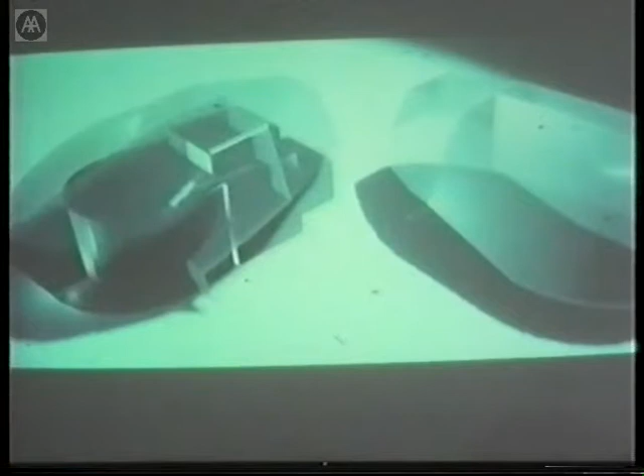So where do we stand today? About 70 years ago, a new approach in technology began to emerge, more holistic and less mechanical. Unlike mechanization that involves the discretization of a system into its component parts, this paradigm proposes the integration of the various components of a system into an isotropic integrated whole. With the birth of the integrated circuit and the information age, integration took command.

Within architecture and the contemporary context, this approach increasingly synthesizes disciplines and new working procedures and networks. New architecture inhabits a section through many spheres of knowledge. Structure, which has always ordered architectural space, can no longer be seen as discrete. Digital technology has created a new order with regards to form, function, methods of production, and materials.

New strategies are needed. Holistic strategies that integrate structure, programmatics, circulation, surface, sun shading, aerodynamics, building physics. New opportunities will be evaluated for their potentials across disciplines. It's a certainty with this kind of complexity comes opportunity. Therefore, it follows that he who controls the tools controls the outcome. And it's the control of these digital tools that we seek. That's the theory.

These are the projects. So I'll just show 5 or 6. Starting with a project that actually I was involved in before I joined Arup. It started 10 years ago in 1994. It's the Singapore Arts Center. And our brief was to develop a dome over 2 opera houses, an opera house and a concert hall in Singapore. And the intent was to make these domes kind of like the kind of leaves that sunshade public spaces in that part of the world.

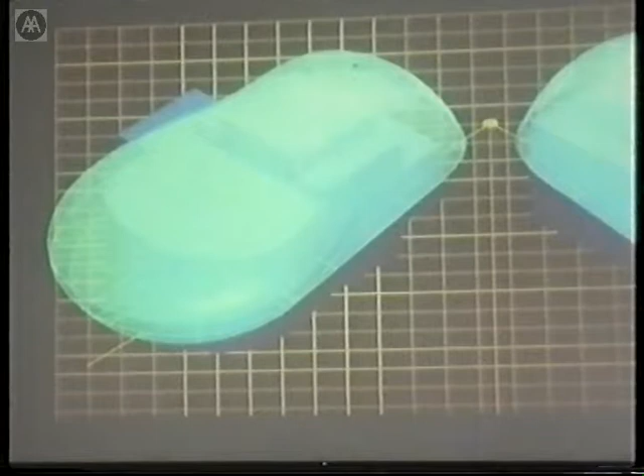So at Atelier 1 at the time, there was a young architect, Barnaby Gunning, who discovered this NURB surface facility in MicroStation. And after a lot of research on soap film surfaces and so forth, we decided to use a NURB surface, which is a kind of arbitrary surface description that comes from computer gaming and animation, mainly. It's based in projective geometry, and basically uses an equation to describe with engineering precision a very amorphic surface. So Barnaby discovered that, and we mapped a sort of tight fit soap bubble, if you like, over these 2 domes.

And then there was another engineer who was involved in a lot of the structural analysis, Chris Hornsey-Jones, an aerospace engineer, who came with the idea of the equal link-length mesh, which is a bit like the Mannheim grid shell from Arup and Frei Otto. But in our case, it wasn't intended that we push it up. We were just using this as a tool to map the surface.

So it's like if you imagine a kitchen sieve. It has fibers in 2 directions, and it would lie flat like a screen. But to impart double curvature, you sort of shear it together as you press it over a dome shape. So the quadrants in the 4 corners lozenge, and the included angle between the members closes up to allow you to tuck the surface together and curve it. So we mapped an equal length mesh over the dome by swinging arcs, but because the surface falls away, we had to swing spheres.

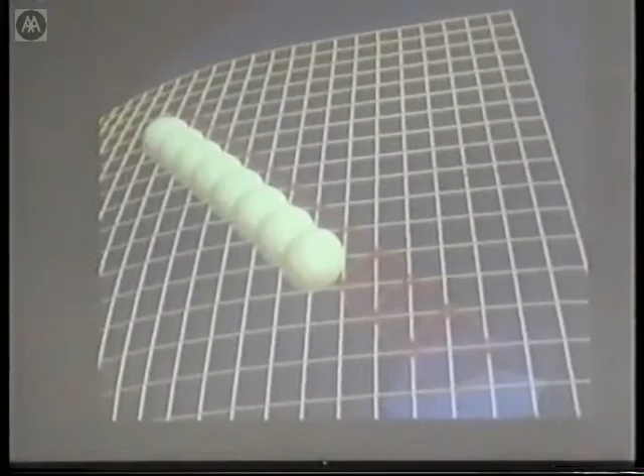And after we developed these meshes, we sort of mapped and described the surface. This was an effort to establish, because all the glass panels, triangular glass panels, would have different angles, always 1500 on two sides and a different included angle. So we're trying to map bands of the variation in the included angle so that you could have a standard double glazed unit.

And then one of the curious things that arises, really through serendipity in a design process, was the fact that along one of these geodesic projections through the mesh, you can see the included angle here is greater than 90 degrees, and it reduces down to 90 degrees around this point and further down here.

By taking one standard diamond shape and fitting it in that bay, as you develop across the surface, that angle folds and the sun shade bumps out. Singapore's on the equator and this building faces north and south, so it excludes light from the east and west and allows views north over Singapore Harbor, and at the back it allows views south out of a rehearsal area. So there's the finished construction. There's a couple interesting things along the way.

Mero won the tender for the structure, and I don't know if you guys know the Mero. It's a spherical connector in a space frame system developed by Max Mengeringhausen. And for years they just drilled 4 holes at orthogonal angles for the bottom chords and 4 holes for the diagonals, and it's a single bolt that goes into the holes. But they'd been tendering for that project with Frank Gehry at Pariser Platz for the bank, that curved grid shell. I think Schlaich ended up engineering it.

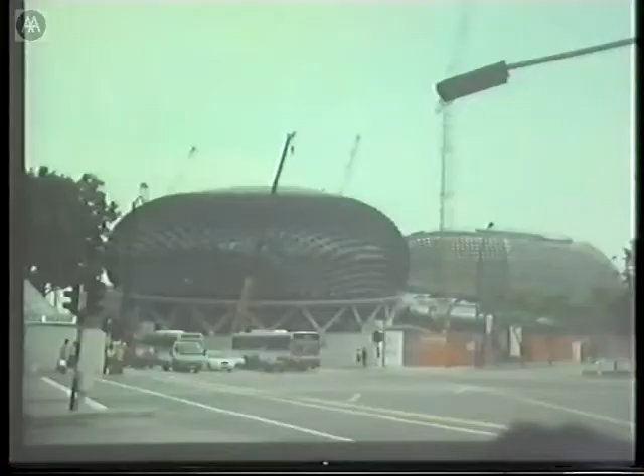Here's the finished project on site. Well, after that, I kind of realized that those buildings faced exactly north, south, and east, west. And as I said, Singapore's right on the equator, so the sun moves directly from the east overhead.

But I thought if the building had been rotated through 30 degrees, the whole sun shading system would have had to be developed through an asymmetry, and perhaps the surface of the dome. In a way, in Singapore, we held on to symmetry, because although we knew that there was an incredibly complicated geometry, somehow the symmetry gave you a kind of basic reference. But after that, I realized the symmetry was irrelevant.

And I wanted to work on a project to take space frame and almost start bending it and tearing it and kind of weaving it like a pretzel. And so this project came up, which Cecil Balmond and myself did with Philip Johnson. It's Chavasse Park. It's a kind of crazy proposal for Liverpool, which went to a major public inquiry and was eventually declined planning. Which was probably the right decision, actually.

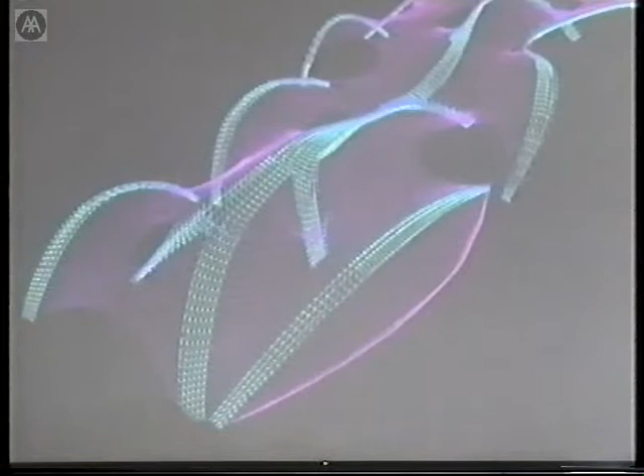And this is a model produced by Francis Archer, one of the guys in the group, very clever engineer with a mathematician's background. And here, all the arches are modeled as space frame, and the areas of anticlastic curvature, which is the saddle shape, in which you could have fabric, because the curvature of the warp yarns pulls against the curvature of the weft yarns. So here we're proposing cable net as an infill between the arches. But of course, following the general rule of lightweight structures, the less you see, the more it costs. So curiously, a full space frame solution was much, much cheaper.

This is just a daylighting study, daylighting factors. The idea was under this canopy to create like the Riviera in Liverpool. And then this is a view of the solid model just before we built a rapid prototype, that STL, the resin model you saw earlier. And here's some of the structural analysis, where you can see broadly these purple lines indicate the compression moving through the arches. And here's analysis of a full space frame option.

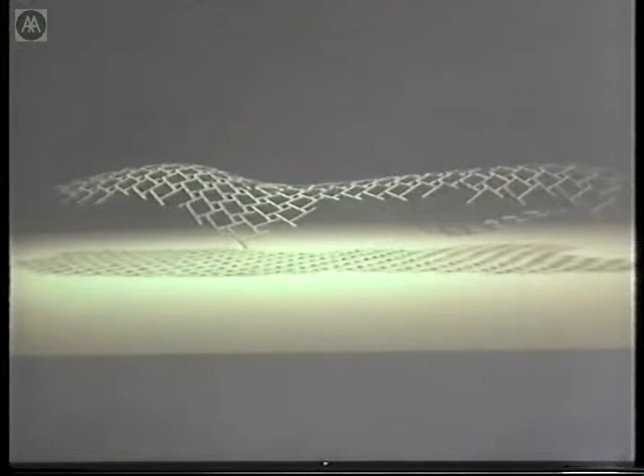This is a project that we're involved in with Shigeru Ban. It's in St. Louis in the States. And it's a timber grid shell. It's in a park called Forest Park. And it's sort of like a Serpentine Pavilion type of scenario, but this is a permanent picnicking pavilion. And it's a reticulated timber grid shell using discontinuous boards.

So what's quite nice is we're using the boards. The boards are straight, and they're offset against one another, so they overlap each other at the connection. So through this small overlap at every connection, you develop a small amount of synclastic curvature. And similarly, if you overlap the boards in the opposite direction, rather than clockwise spiraling upwards, if you go clockwise spiraling downwards, you'll develop synclastic curvature that's concave upwards. And you can also develop anticlastic curvature.

So one of the guys in the group, Tristan, just used, within our analysis software, our nonlinear solver, a tool where, as a kind of pre-stress load case, you can apply a lack of fit to a structure. So what we do is we just build the whole grid flat, and then the overlap is applied as a lack of fit. And what happens is when you run the analysis, the surface just bumps up into the curvature that it takes.

And so here's a model where they're spiraling downwards in this direction if you go counterclockwise, and upwards counterclockwise in this direction. So the surface that develops has both curvatures.

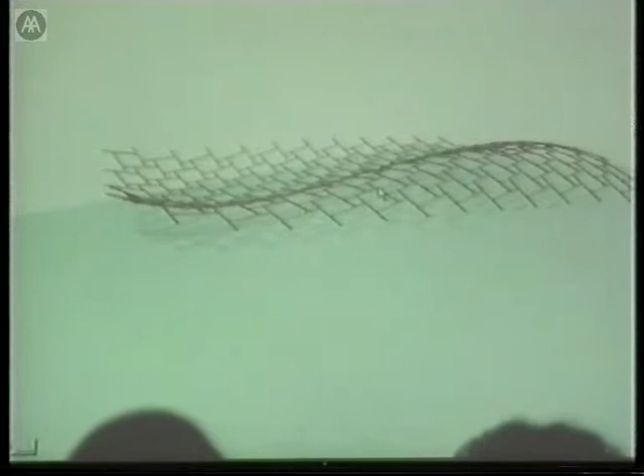And one of the guys in the group, Benedict Schleicher, who I think I saw here earlier today, went with Shigeru Ban to Rice University, and they built this 1/2 scale mock-up, which demonstrates the system. What I find particularly interesting about this is it's not really a form-found surface, but the surface has very specific properties, because you can see the boards here are curved, and the geometry doesn't just move into a state where every board is straight.

There's a lot of locked-in internal stresses. There's a lot of embodied strain energy inside the surface once you've applied all these twists, all these overlaps. We have to make sure that it's not too difficult for the people on site to assemble. Otherwise, they physically won't be able to manhandle the boards into that position. So we have to study those locked-in stresses.

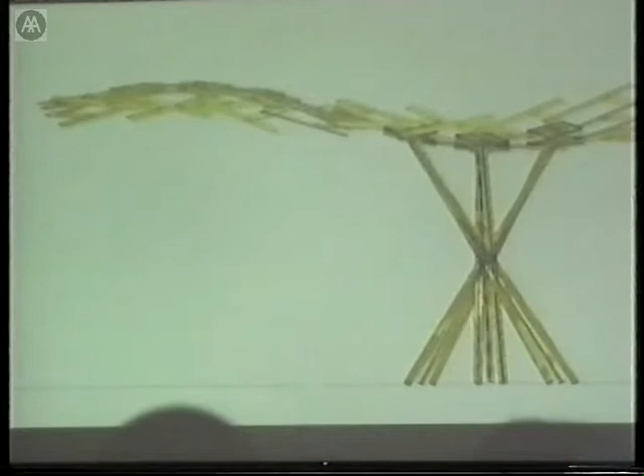But also, the surface itself is developed through not just straight geometry, but through the inherent qualities of strain energy within the surface. So it's like an integrated geometric and statical surface operating at the same time. So that's just beginning on site a little later this year in St. Louis. And these are just studies for the column, the idea of putting little plates inside the smaller squares in a bundled column.

This is the Ito Pavilion, which I'm sure many of you have seen. This is Ito's original proposal. He had a couple of strategies, but these two both refer to the idea of a beautiful box. The one on the left is a little bit like a pavilion he made in Bruges, and the one on the right, he drew on some ideas. He'd seen Cecil's proposal for Chemnitz Stadium, and he was interested in the idea of the use of algorithm to develop geometry.

And you can see his original models, which are effectively just a chaotic arrangement of bars, which certainly would have been possible. I mean, we could have just solved that and built it. But somehow, Cecil felt strongly that there was an underlying inherent order that could achieve the same, or even stronger visual quality.

And he and one of the engineers in the group, Daniel Bosia, found this algorithm, which is incredibly simple. It's just taking a square, going from a half to a third, half to a third, half to a third, developing the square as a ziggurat, and similarly going from a half to a third, developing the square, and so on, until you get this pattern, and then extending the lines out to infinity. So that pattern developed the entire geometry of the pavilion. The center of the square is offset, otherwise all four elevations would have been the same.

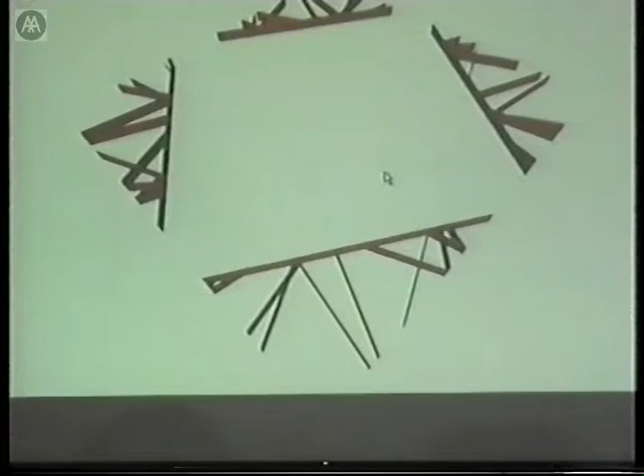And that's exactly how it was built. This shows it still before the center of the square had been moved off. But it was built through a panelized system, so it's literally a ziggurat of steel beams, with all the members off the side here just purlins that restrain that steel flat against lateral buckling. And the panels were built in sequence, spiraling toward the center.

And with William Hare, steelwork fabricators, we used this package Xsteel because there's about 1,500 plates here. And quite importantly, all the plates had to be cut square, because they were cut out of large plate or off of bar with a laser cutter. But the exact line of that cut related to the thickness of the plate that it came against, as well as the angle that it came against that plate.

So Xsteel is a package where you basically build a virtual building model of all the steelwork. So there's no shop drawings involved, and each plate is stamped and cut. And so you can see, it was only later that Ito decided, really because of solar heat gain. Originally, this was a glass pavilion, as per the earlier models.

And there was a sort of standoff between us and Tokyo when we told them, it's going to get too hot inside there, and some of it has to be opaque. And it was sort of like 15%, 20%. And finally we said, no, 50%. And then there was about a kind of 10-day radio silence.

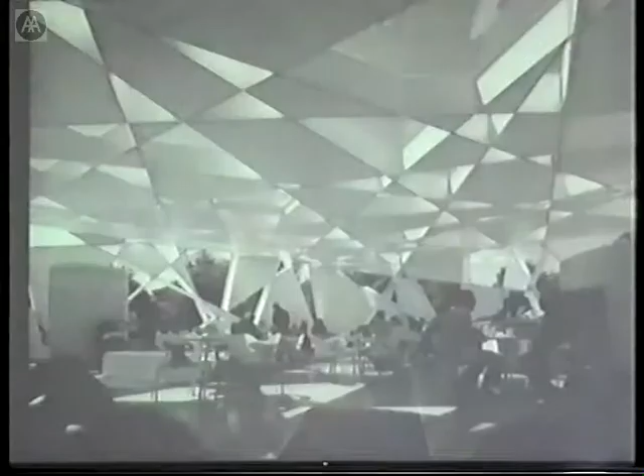This is a project we did with Chris Ofili and David Adjaye for the Venice Biennale. It's a little glass ceiling that was indoors inside the British Pavilion. And Chris had this pattern of a 7-pointed star that was a motif that ran through all the paintings he was showing. And he asked us to make a glass ceiling, rather like this pattern.

So these are some of the early models. We have a thermojet in the office, basically used for visualization. And what we eventually developed was a circular arrangement with 7 septants of standard geometry. And Daniel Bosia in the office wrote a little routine where from the center of gravity of every panel, they were distorted out to match this slightly coffin-shaped perimeter of the room.

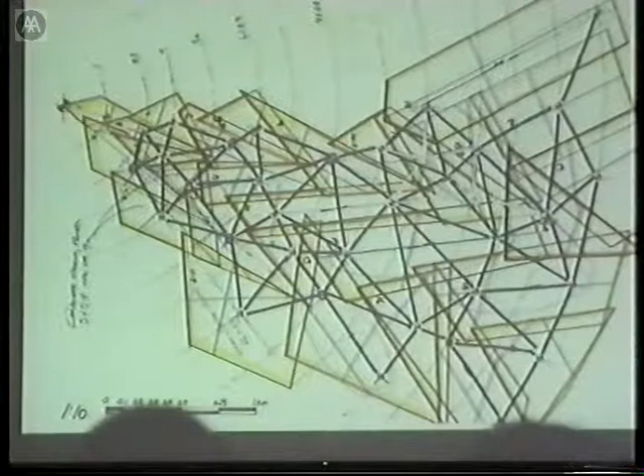And then once we'd mapped the geometry, we took center gravities, and Lip Chong, a student of Michael's from Unit 4 who's working in the group, did all the collision detection in the computer so that we knew none of the panels were hitting. And we identified the center gravity of every panel. And from that point, put in a space frame node with half of the nodes at high level, half at low, and developed this kind of slightly eccentric space frame topology.

So these are the bars that the glass is glued to, and that's the top chord of the space frame. Those are the braces, and then the bottom chord of the space frame. So here you see this kind of eccentric space frame geometry relating to the center gravities, and then with the glass beneath. And we got Marot to make the space frame for us. Structural analysis is nothing particularly of interest.

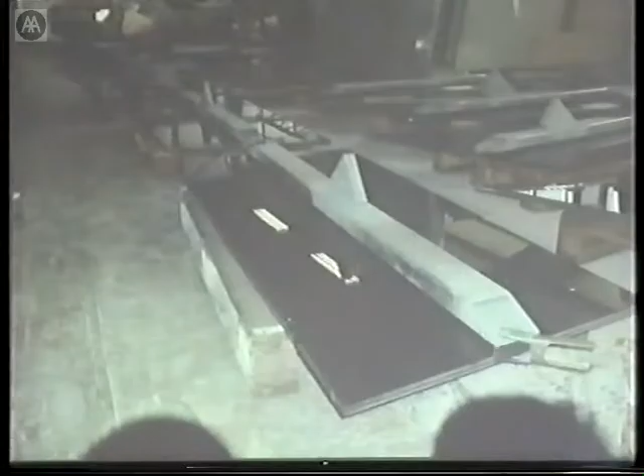And that's the model of the ceiling inside the hall in the British Pavilion. And you can see it was a very beautiful space frame, actually. These are some of the drawings. And the glass panels with the structural silicone. And this is the assembly on site.

We were very limited because of time on the color of the glass, which I think was a great disappointment to the success of the installation. But here you can see the kind of motif in the glass ceiling.

You've probably all seen the Marsyas project, I suppose. What's interesting and what we've learned from Anish Kapoor is that Tristan Simmonds, who was the engineer, slightly modified our software. Because it's indoor, it's extremely light loading. Normally you're looking, in membrane structures, to find a uniform stress distribution. But you can actually nip and tuck a membrane rather like a suit. So after you've found a surface of minimum area, you can begin to tweak it.

And Tristan worked incredibly closely with Anish to kind of tailor this into the exact sculpted form that he was looking for. We spent about 3 mornings from 8 till 10, or sometimes 11, 3 days a week for a period of about 5 months before he was happy with this. It was quite amazing to look at somebody who works with such control over their medium. And there's the installation coming in on site and being stressed.

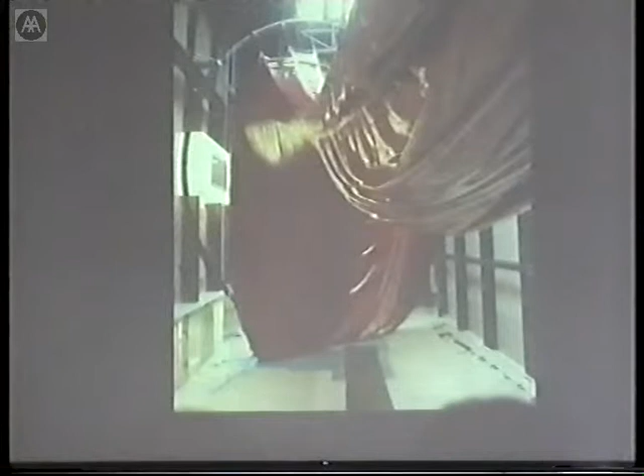And the finished installation. The steel ring was impressive hanging, but effectively, you can see in these joints, there's actually a nylon webbing belt that runs the full length of the hall, and that's a 150-meter long catenary. And then the membrane in this area is effectively hanging across those series of belts. The thing was, when you're inside the space, you couldn't actually see the catenary, so you had no idea how the ring was supported.

Okay, this is the last project I'll show. It's the one we're working on now. About 6 months ago, we got involved in master planning at the Battersea Power Station. And the group is involved in this whole area, the South Park, but I'll just show this one office building that we call the Twist.

The form arises out of specifics of the site, but the important quality of it is the client wanted it to be permeable to the community beyond at ground level. So it lifts up off the ground and then comes back down on the opposite side. And there's a core at either end. And the main problem is spanning 60 meters between these two cores.

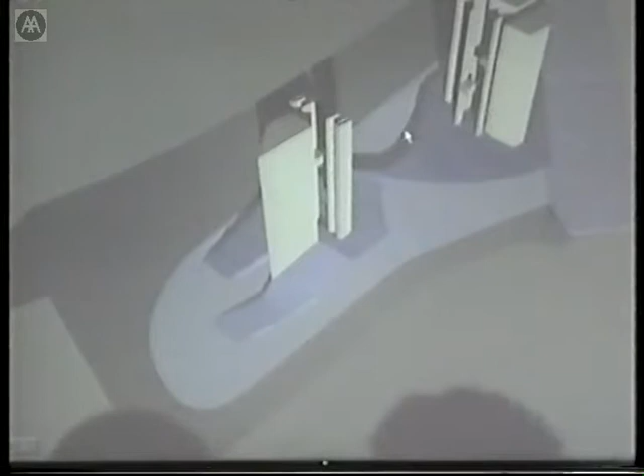So beyond just the twist in the external form, here you see the cores. We've looked at a system of running trusses across that space. So the idea was, within an atrium space, to take the edge of the slab and actually twist it up and develop some kind of truss profile through the atrium. So here you can see the surfaces twisting through 180 degrees.

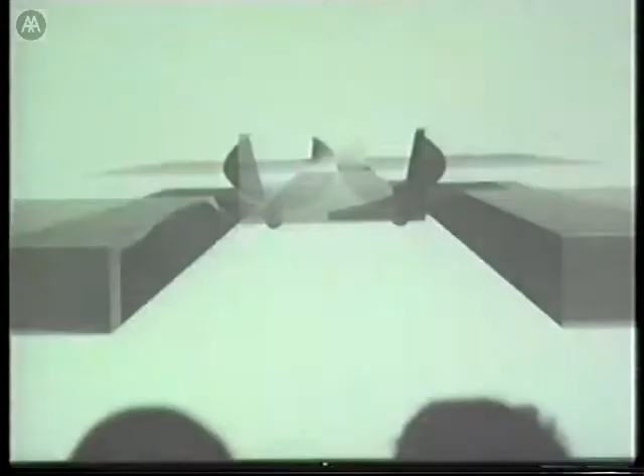And also, this building's used as a kind of showcase building for products. So they just want people to be able to move through it in many different ways. And so what we're trying to do is integrate circulation paths with structural trusses. So this is a kind of quick build-up of that atrium zone and the floor slabs that relate to it. You can see there. And then from the center, it's built up in this way. And a laser cut model showing the routes that one can take through the building.

So here you can sort of see, this isn't the exact solution, but the kind of bending moment profile between the two cores, and in plan. So the plans are kind of curious. You get this atrium zone with twisted trusses. And similarly in section, you get a very regular section at the one end and then going through this transformation as the twist passes through space.

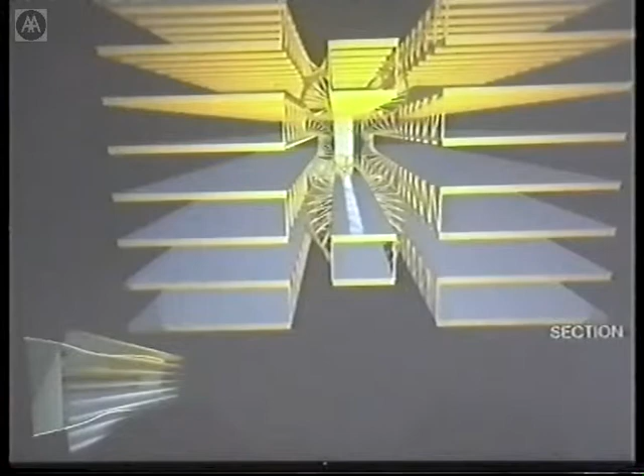And this is a kind of fairly crude model showing the buildup of the trusses and then the steel composite flooring going in and the atrium space in between. So that's getting pretty close to the structural solution for that atrium zone. And there's a short animation here, just kind of moving around the building.

And so the intent is you enter from the southwest corner. This is going to be a building, hopefully, by UN Studio if we're successful in securing their appointment. And then there's a route on the right through a kind of public space at the lower level and then into the center of the square. You can see the cladding hopefully will be a kind of opalescent, not necessarily dichroic glass, but something where you can see the reflection of the city, the overall form, and the activity of the building beyond.

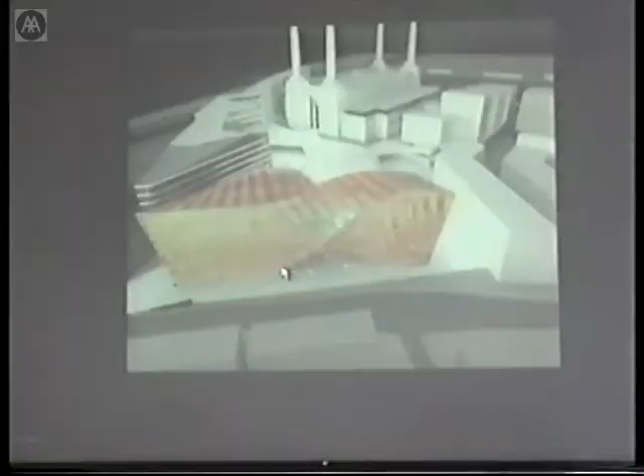And there's just one more slide of this, which is quite a subtle one, but it shows the system of triangulation that we're intending on the facade. And just to give you an idea, basically the twist is defined by two splines, and then the surface is just lofted. So there are straight line generators, and in the system of triangular facets, those straight line generators form one set of joints.

The second set is formed by the floors themselves, because in a cladding system, you need fire compartmentation and isolation between the floors. So there's a second line that passes through here in the jointing. And then the third line is just the diagonals which that forms. But what I find really remarkable is that the resolution of this diagonal edge of the twist has actually been integrated within the triangular system of the glazing.

And I think it's that kind of subtlety in the formal manipulation and the constructional logic that forms the basis of the kind of building, and that kind of integration of performance that we seek, both in projects like in Singapore or here in London.

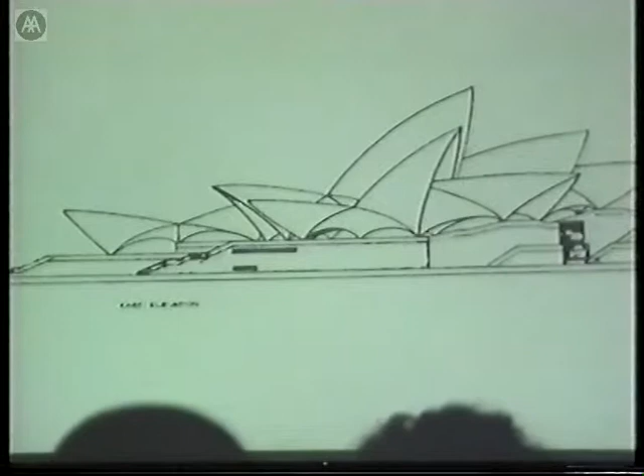Thank you very much, Charles. Talking about applications in very different circumstances and conditions with very different outcomes. Charles's talk, I think, helps very much to make the link between earlier contributions, from the theory through to the design conceptions and then into realized projects.

And now, for our final talk this afternoon, we have Johann Sischka of Waagner-Biro, based in Vienna, who's going to talk about manufacturing complexity, something that he's done quite a lot of, particularly in projects such as the roof over the Great Court of the British Museum.

Okay. Good. Thanks for the invitation. I just saw that my computer is switched off, so I think it takes once again some time to get it up to speed. Maybe it comes easy. We'll see. Working now, isn't it? It's once again off. It's okay, yeah. Sorry for the problems, but I think we've resolved them.

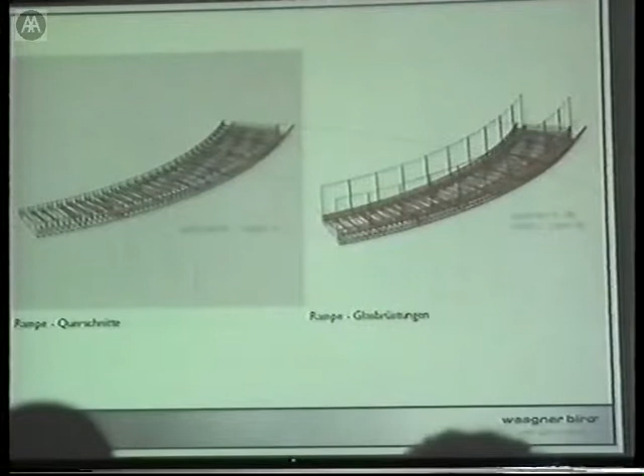What we did when we developed the computer program to realize it, we started off with the curve, which is the one which was given by the engineer. We also had to calculate the level of pre-camber once the load is released to get it horizontal. And what we did, here you see the section, we just put the section every 25 centimeters along the curve with the right pre-cambering, and then we combined all these profiles to get the shape, and then we created the plate out of it, which finally was unfolded to be cut.

And here you see the various elements, and this is the principle of how we fabricated it afterwards. The only thing which was constant over the length of the ramp was the section. So we created these forms which represent the section, and we have reassembled them onto a flat plate for each individual ramp section, and then we laid out the profiles inside there, as you can see here. Here you see the plate which goes into this form, into the template, and here you see how we marked the positions of the other plates which have to come in, and so we finally reassembled the whole structure.

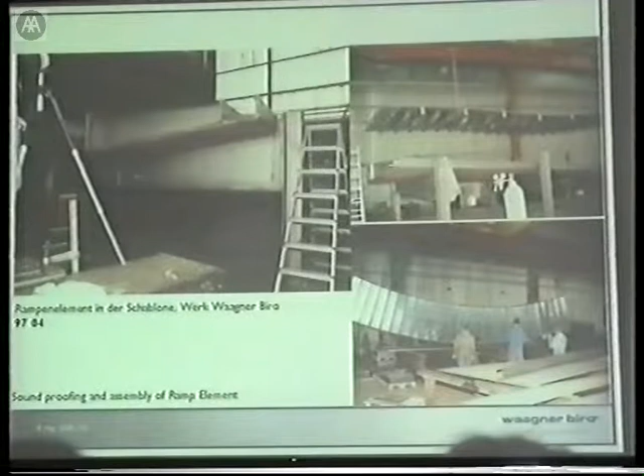In order to have some damping system on the top plate, we used another plate and some glue in between to damp the ramp, because it's a hollow body, and if it's above the chamber and people walk down, it shouldn't create any vibration.

The rib itself was fairly easy. It's once again a triangular shape, but it follows a curve, and all of the 24 ribs are the same. There was no diagonal bracing involved, so here you see in an oversized manner the deflection you get from wind speed, and the moments you need when you introduce the horizontals here. So we needed a fairly stiff connection, which was done by this cast element. Here you see it in reality.

Coming back to the sunshade element. With all of the jobs, I do learn a lot, and on this one of the things I learned is a little bit about what the sun does over the year. And as I'm sure you know, it doesn't go constantly, so we had to find a control system which allows the sunshade to move with the right speed, to be at the right position at the right time, which is different on every day of the year.

Here you see the platform on top where the ramp comes in. It's 12 hangers where it is supported from the dome, and this is a ring which is running underneath the platform and where the whole sunshade element is hung from. There is no other support at the bottom, which was originally planned, but we could get rid of it, so it's just a cantilever coming down.

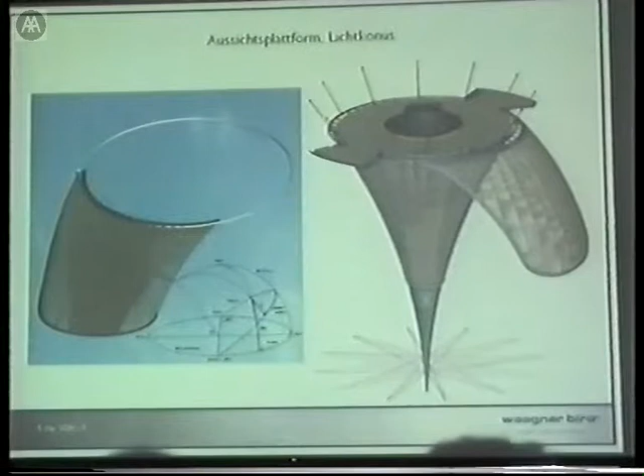That shows the technical detail and some of the issues we have to deal with in the discussions with the architects. This is the ring beam of the platform. Here you see the ring of the sunshade element supported by these rollers. This one is driven by a friction drive with a frequency converter on the inside. Here you see spots. That's the fixation for the balustrades. And you can imagine there's no real space left for anything else. So it took us more than a day to get to this solution in the discussions with everybody.

This is the main frame of the sunshade element, pre-assembled in the workshop. What you can see here is that welding always means distortion. It's bringing in heat. It changes the shape slightly, so we had to heat treat it afterwards to find the shape. That's another view. That's where the top ring comes in.

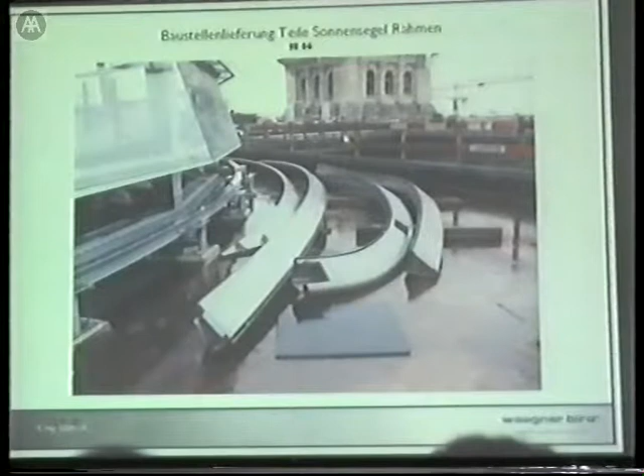And that's a nice picture, which I like quite well. When we delivered these elements to site, you can see how the shape really is, and it looks wrong, I would say. It doesn't look right. They don't follow the curve. They don't seem to fit together, which was subject to some comments at the time. But the next picture tells you that what obviously isn't right is right, and when you put it together in the right manner, in the right sequence, it comes up with what we want to have.

And this is the final product of the sunshade element. That's the dome at night. And this is something which I always like to show, because it shows that a lot of people are still queuing up to get up there, and that's something which I as an engineer, I'm very proud of, that what

we do is not just something which is a challenge for us. It is something which people accept, which people want to visit. Not good to queue up, but it's good to see that a lot of people go there still.

Another project, which was one of the earlier ones where I was involved as a project manager, is the dome, the roof for the Sony headquarters in Berlin. It's a combination of a steel structure with cables, with glass, and with fabric. It's Murphy/Jahn and Arups.

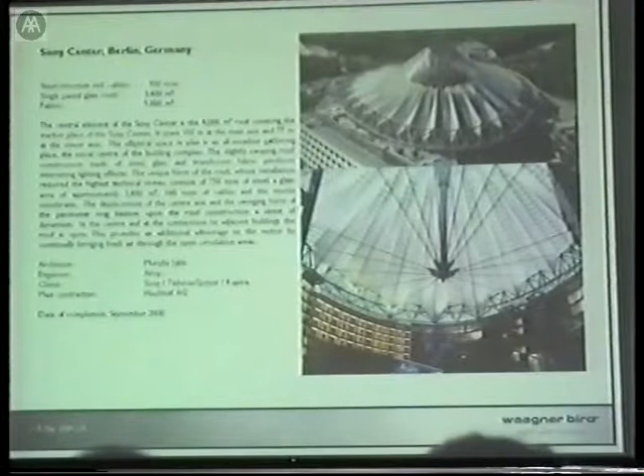What seems to be quite simple: you have a rotational axis, you have a hyperbola, you rotate it around, at every 5 degrees you take the shape with cables. Here you got two ridge cables, glass in between, a valley cable here, which would be quite an easy geometry, but what the architect then did, he rotated the central axis by 8 degrees and cut it off horizontally.

What he then produced was something like an elliptical shape, which you can see here, which was the footprint of the atrium. This is approximately 100 meters, this is 80 meters, so it's quite a size. The valley cables all come together to a tension ring, which is not linked to any of the other elements, and the fabric itself is a structural element which avoids the whole roof to go up during uplift.

And the king post in the middle is 45 meters long, and at the bottom point it's suspended back with the cables to the ring beam. The whole system sits on top of 7 different buildings at a height of 40 meters above ground level. One of these 7 supports is fixed. All of them are fixed vertically, of course.

One of them is fixed horizontally as well, in both directions, another one horizontally in one direction, and all the others are sliding. So basically the buildings can move independently from each other, and it doesn't affect the ring beam. But internally, the roof itself is a highly sophisticated system with a lot of internal pre-stress.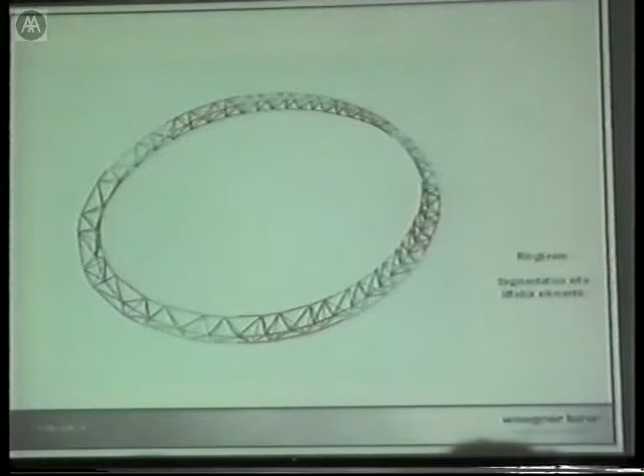The whole ring beam had a weight of more than 500 tons. We've broken it down into 11 pieces with approximately 50 tons, a little bit less. And because of the size of 6 meters width and 6 meters height, we couldn't pre-assemble it in the workshop. We had to bring it to site and we created a pre-assembly area there to put it together at ground level and lift it up with cranes.

When you look at the geometry, you can see here it's a tubular structure. You need brackets for the cables to link in, and as you can see here, it's quite a complex issue in itself. When you take down the chord, you can see from the marks of the stiffeners and the sequence of how the various diagonals are fitted in that it gets even more complex.

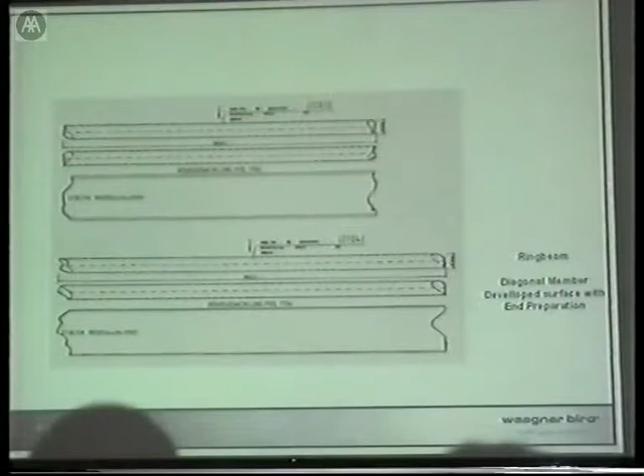This is a fabrication drawing for the brackets. That's how they looked. This is what we did for the tubes. The end cutting of the various tubes was complex and of course different. We developed computer programs starting from the structural information where we created the elements and where we automatically generated the data for the cutting process and for the pre-assembly later on.

Here you see how the elements arrived on site, because I said previously we couldn't do too much in the workshop. We had to bring everything to site. This is a good example. We marked the top point of the tubes so that, once we know which tube it is, which end is the top point of it, to enable us to orientate it during the pre-assembly.

And here you see the pre-assembly process. We had a template laid out. We laid out the 3 chords at the ground level. We fitted them together. We finally welded them. We lifted up the chords and then we fit the diagonals in. And as you can see here on these pictures, this is how it went up using a huge mobile crane from the inside of the atrium. And here you see the almost complete structure. That's the last element which went in.

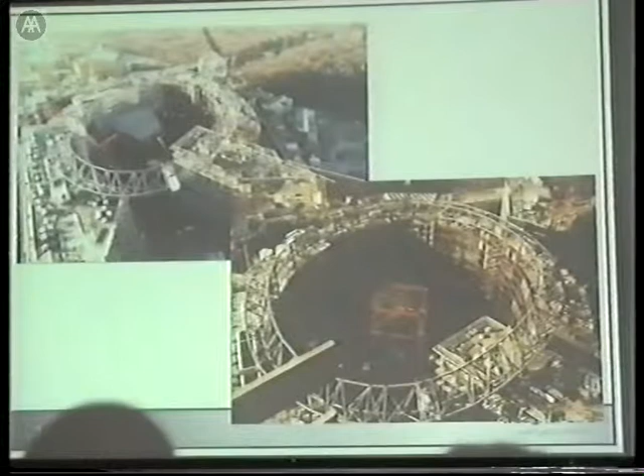What you also can see here is that we had to build up a temporary structure to build the king post. We decided to build it in a vertical position right from the bottom level on. This is the principle I described before when I said we shortened the king post. The way we did it, we had a solid bar in the middle with a length of 70 centimeters plus the extension into this block, and we shortened it during the installation, and then we extended it with the hydraulic jack with 1,500 tons capacity to fill in this green piece to finalize the pre-stress.

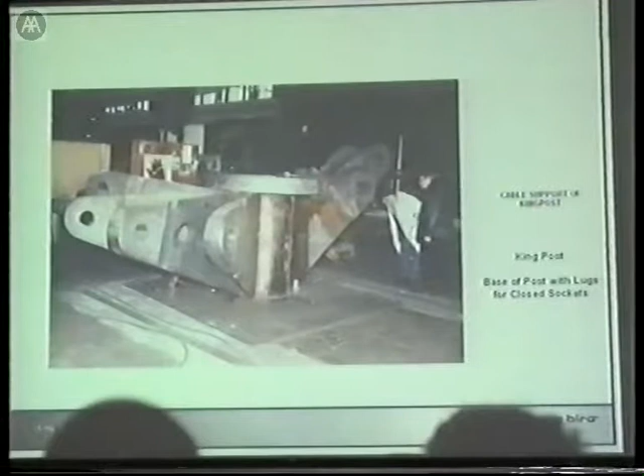That's the bottom part, which you just have seen in relation to people. If you have been there, it looks much nicer when you look up at 20 meters height than it was in the workshop. But I think we needed these massive structures to cope with the loads. This is the top of the king post, the top ring, where you see all the holes for the cables to go in. This is the bottom piece with the solid bar where we fed in this connection element.

And what you can see here is once we had installed the king post, we lifted it up vertically, we guided it within the temporary structure, and then we inclined it to 8 degrees and we only suspended it back by some cables. And then we discussed what's the best way to install the rest of the structure.

One of the ideas would have been to position a lot of tower cranes around the surroundings, because there was no chance in between the ring beam and the king post to go through with a mobile crane, because we needed this space for our structure. And finally we decided to put the tower crane on top of the king post, which was a really challenging issue. And there were not many people who believed that we really would do it. But as you can see from the pictures, it was done.

We put the temporary structure in here, and we just got the crane up there with a jib length of 51 meters. And the capacity of the crane at the end of the jib was 3 tons, so it wasn't the smallest crane. With this crane, we pre-assembled the fabric areas. Of course, the fabric was cut short, as it has to be with the compensation, once it's pre-stressed to get the final shape. We pre-assembled it at ground level.

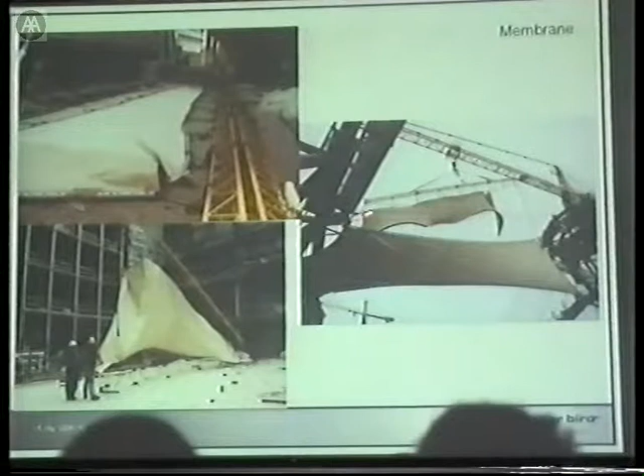We put all the bracketry onto it. We also integrated the ridge cable, and then we lifted it with this beam, and people were at both sides of the structure to link the cables into the system. We really tried to avoid building up a huge scaffolding. It costs a lot of money, and it would have blocked all the other works ongoing on the site. So we had no scaffolding.

And what you can see here is an abseiler going down and linking these fabric panels to the valley cable. This is a picture where you see these wrinkles, where you can see that it's not fully pre-stressed. It's the situation which we had after we had put all the elements together, still with the short king post. Here you can also see the tension ring where all the valley cables come together. That's a pre-assembled picture from the outside, still with the crane on.

And this is the hydraulic jack we had created ourselves, and this is how we pulled it apart. And here you can see the 70 centimeters already being free, and then we added the plates in there. This graph should show you how precise it was possible to calculate this operation. One thing, during the pre-stressing, the distribution of the loads within the cables changed. And before we started the pre-stressing process, we monitored the stress in all of the cables, and we adjusted it slightly to get to the pattern we needed to have to start this pre-stressing process.

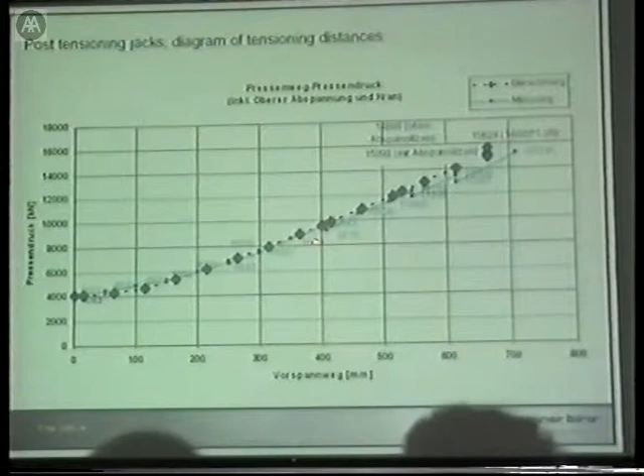What you can see here is a special phenomenon. It's the wrinkling of the membrane. We had to wait at certain positions for 1 or 2 days to get the membrane to adjust, and if the yarns line up, we lose some of the pre-stress, which means that we did fall down a little bit, but then the tangent was the same as calculated, and I think the theoretical calculation and the reality were very close together.

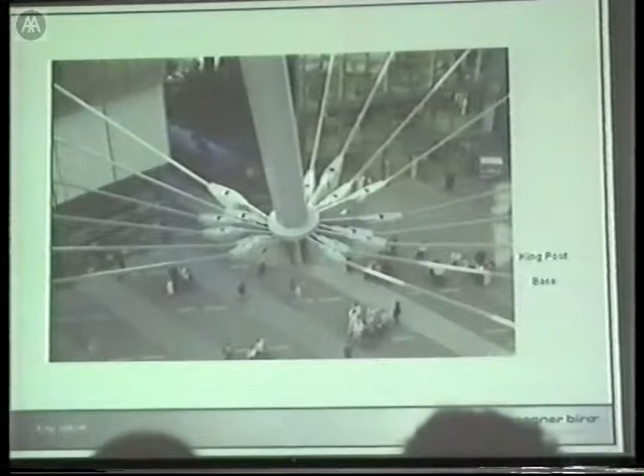What we also did during the pre-stressing, we picked up the cable with the highest load and we constantly monitored it to be sure that we don't create any further forces into the system which we haven't calculated because you couldn't see it. And that's the final look down. That's the very tiny node, 20 meters up in the air, and that's the whole roof from the outside.

The other project I wanted to touch, which is very close to here, which was our first project in the UK, and a really challenging one as well. It's the roof of the British Museum, Great Court, which is a triangular structure with triangular glass panes, and all of the panes have got different shapes as well. We got 4,878 members with different end connections, with different geometry, and 1,700 nodes. That's a computer model. It's a Foster project, and Buro Happold as the engineers.

One of the key things which you wouldn't pick up when you look at the roof at the museum was that we were not allowed to put any horizontal forces alongside the perimeter. The reading room couldn't be loaded because it's a very fragile structure. So what had to be done was to introduce 20 columns here which take the load at the center, and to have a perimeter beam here which is only vertically supported towards the buildings.

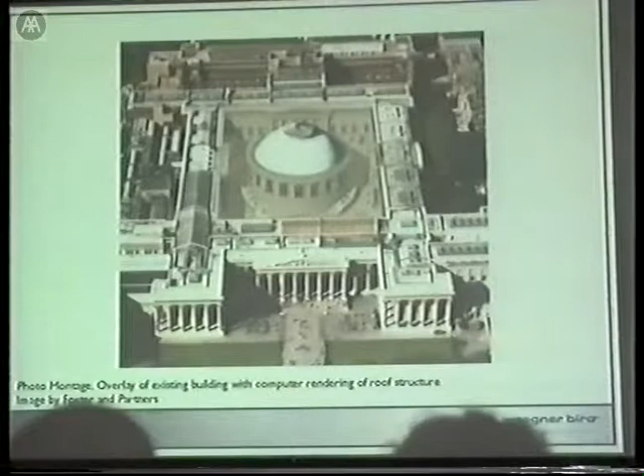One thing which we did, of course, in order to achieve a straight line once we released the structure, when we built it, this perimeter beam wasn't built as a straight beam, it was built as a curved beam to the inside to compensate for the deflection which will come once the dead load is activated, which means that we have pushed the sliding bearing to the inside, which also gave us some comments from the clients and from the site team what we are doing. They want to have a straight beam, and I said, oh, well, we need to do this in order to achieve the straight beam at the end.

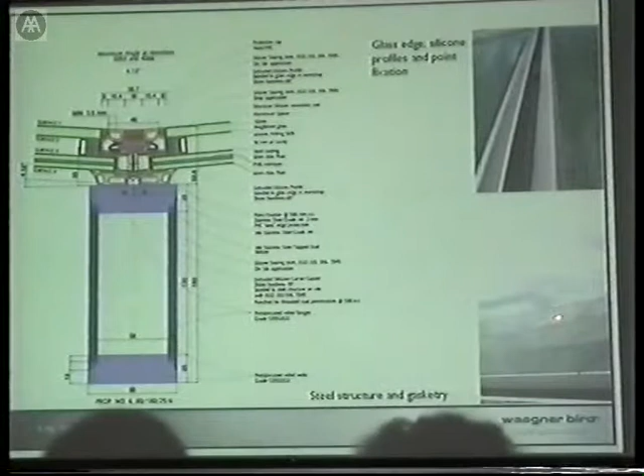The biggest question at the beginning of this job was, what is the best, or how can we deal with the node? Because one thing I didn't mention, and I'll go back to the slide once again, the orientation of the beam is in equilibrium with the two angles. So this angle here and this angle here has to be the same one, otherwise the glass fixation and support detail wouldn't work. When you consider that further, and when you project a normal vector alongside each of these glass panes, you will immediately understand that these 6 members which come into the node, they come with a slightly different orientation. And to cope with that was the big question at the beginning.

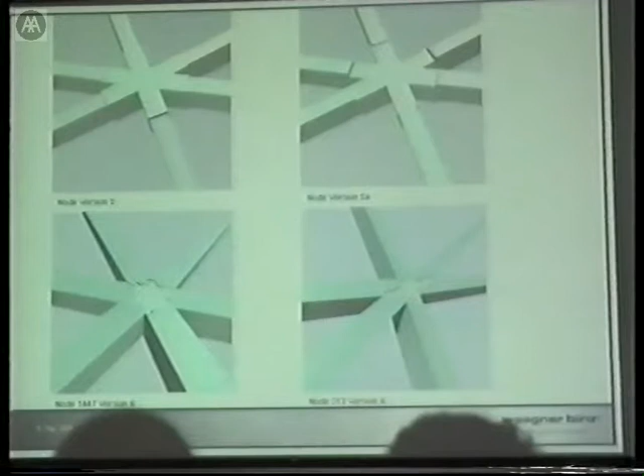And here you see some of the node proposals which were rejected by the architect, and I think you understand why. But it was just to play with the geometry to understand what is the implication of the geometry and how can we deal with it. Here, these steps are there not because of fabrication tolerances, they are just there in order to compensate for the twist, but of course unacceptable as well. And then we end up with the final geometry.

What we said, we want to put the complexity and the costs in manufacturing this into one of the elements. So we decided to make a fairly easy node, which is cut from a plate perpendicular to the surface, and then we treat all the end connections of these members differently so that they fit into this gap created by the node and can be welded to it. That's the detail.

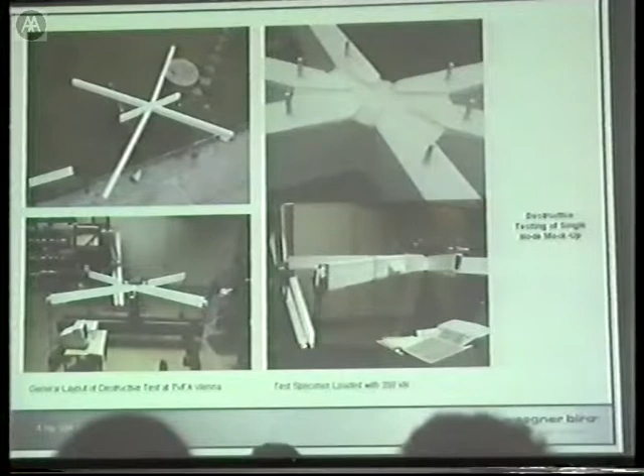To be sure that things which we develop on the computer work, we decided to make a very early model, which is this one, and it confirmed that we're on the right way. This is the testing, the structural testing to see whether the ductility is good enough to cover the bending moments, and it was successful. The next idea is how do we install it? How do we fabricate it? How do we install it?

The museum is in the middle of the city. There's no way for any pre-assembly area here; to build the roof up on site at the roof level would have taken at least another half year or even more than that. So we said we start off with a triangle, which is the easiest and can be handled easily as an element. And then out of triangles we built ladders, which are prefabricated. The size of the ladders was determined in order to allow transport to site. And afterwards we have finished off these loose members on site.

Here you see the principle of the triangle. There is a line which is the basic symmetry line, which is not in the middle of the profile. It is on top of it. But you also can see that a lot of the members are tapered because we got different heights of the nodes on the three sides.

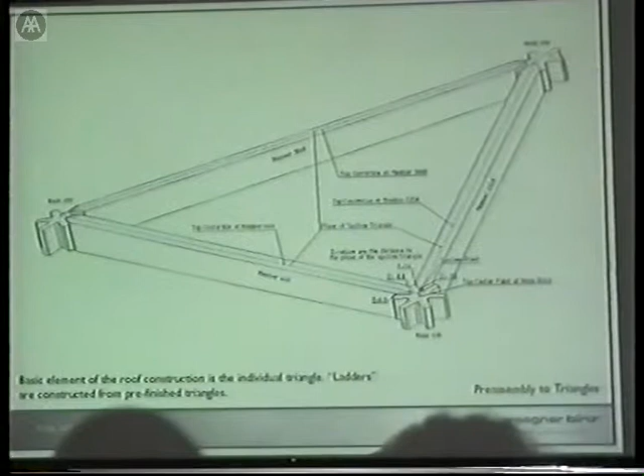And from this baseline on, we developed a computer program where, using the structural information of plate thicknesses and sizes, we developed a 3D model, which was then the basis for the workshop machines to cut the ends. And nothing was done manually, everything was programmed.

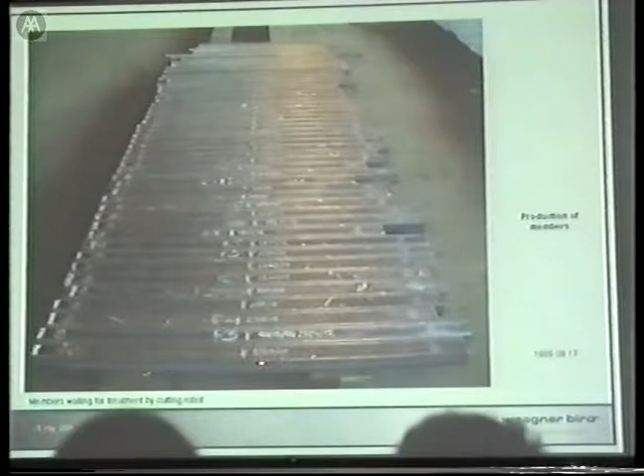The members were pre-assembled with overlength, then automatically welded with submerged arc welding. Then we laid them out, marked the center line, both ends, and the number, and we broke it down into different delivery parts so that we get the right elements to site at the right time.

And then, with the information which was created from the computer, we got directly into the workshop. We amended a welding robot to a cutting robot. We got a turntable here. We cut one end, and then we turned around, we cut the other end. And the man at the machine, the only thing he had to do, he had to look at the number on the beam, find the same number on the screen, and then press the button, and the element was cut.

There's still, and this was what the previous speaker said, an element of logistics left, so you shouldn't believe that the costs are the same as a repetitive process where all of the elements are the same, because the logistics step in. But it's a step forward in order to minimize the extra costs and to make these kind of structures affordable.

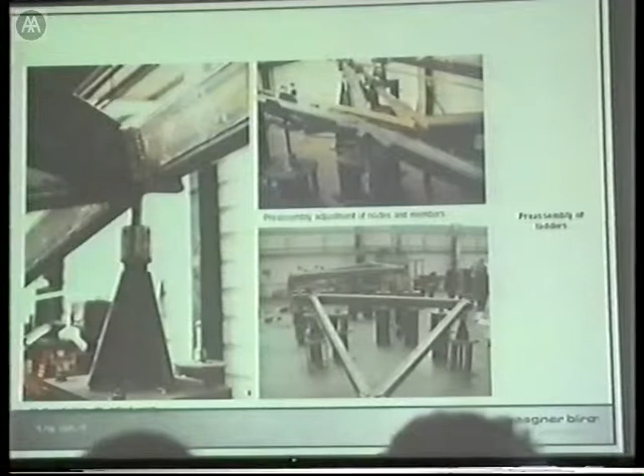This is how we put the triangles together. It's quite simple. At the end of the day, it has to be simple, but it has to be developed in great detail, because if it fails, it's fundamental. And then you can see how the triangles were put onto other jigs to get the ladders complete. And that's the ladder, how it came to site on the working platform.

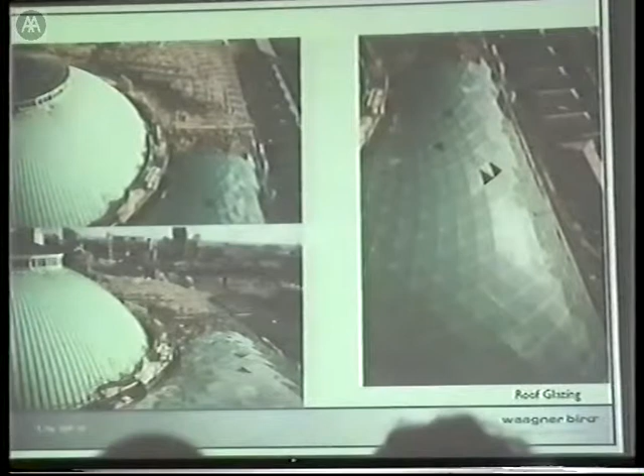The final challenge was to release the structure. You remember we said 150 millimeters in certain areas, and we had more than 600 props. To just lower one after the other wouldn't have been the right process for such a delicate structure. So we said we'll go in circles. We do 25% of the predicted depropping first, and we define 12 phases, and we deal with all of the props in the phase at the same time.

We printed out data, how much each prop has to be released. We put it onto the props, and then we got people there to move it down in the right way. And so we lowered it down and finally got where we are now.

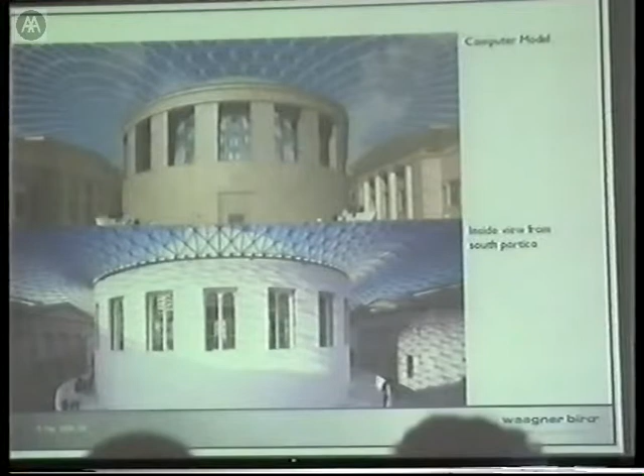What you can see here, that's a computer model from Foster's in the early days. That's what the reality was, and I think you can see that the reality comes really close to the computer model, and that's how it should be. It's a day-night. The glass itself is a body-tinted glass to reduce the light transmission. At night it looks much more transparent from the outside than during the day.

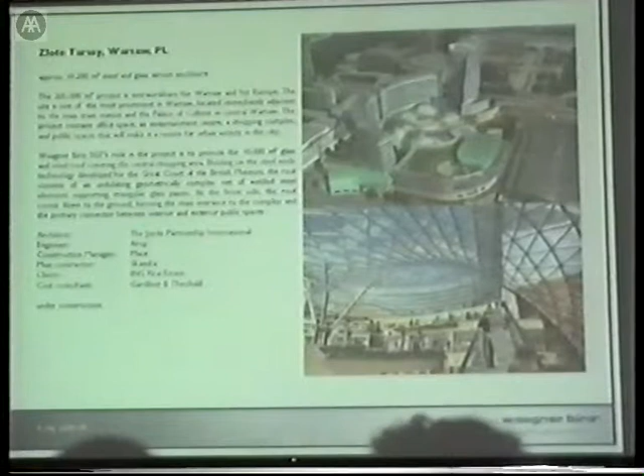I want to show you quickly another job which we're just working on, which, you could say, follows the same principles as the British Museum, but it's another level of complexity. It's a job in Warsaw, a 10,000 square meter roof over a shopping mall, and it's a project from Jerde together with Epstein and Arup engineers, and it's 7 spheres with connections in between.

The architect said he put the handkerchief onto the spheres to get the shape, and it's supported with some trees from the inside. What I got here is also a small animation, if I can just go over to it.

Where is it? Oh, that's the wrong one, sorry. No, that's the one which I wanted to show you later, probably. Go back. No, that's also the wrong one. I'm sorry. That's the Gateshead.

It's an animation which was done by Epstein to show how the job will look like.

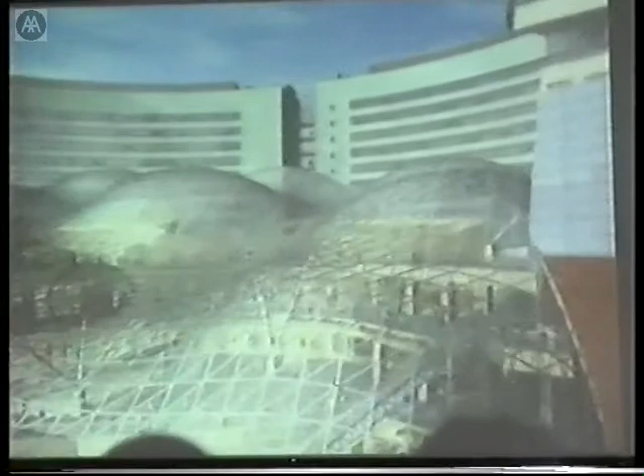I think it will be a fantastic structure. We are to start on site within the next days, and we've already gone through half of the prefabrication, and we are ready to put the structure on top of this magnificent building. It's more than 10,000 square meters, so it's approximately twice the size of the envelope from the British Museum. So it's a huge structure.

That's a model. I said it was an extra level of complexity. When you look at the sphere, which is represented here, then everything is easy. The orientation of the elements towards each other lines up perfectly. The node is not the problem. Number one here is a saddle situation, and on a saddle situation, things get quite nasty, which I'll show you now.

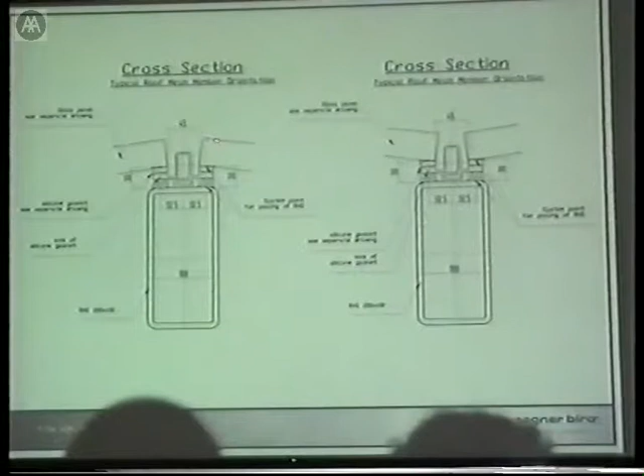That's the detail, how the glass fits on top. We are using RHS sections with some gaskets and the glass gets on top of it. Here you see the maximum angles. On the British Museum we had the center line running here. When we did this, the joints didn't line up anymore with this complex geometry, with the twist, which was much worse than on the British Museum, so we had to define these points as our basic geometry points, which are on the underside of the glass pane, where we're working from, and the steel comes where it goes.

Here you see these lines coming up, and everything underneath was projected from these lines. When you look at the node at the top, the center lines come almost together. The difference comes just from the distance of the gasket, because the perfect line is on top of the gasket and not on top of the steel. When you look at the bottom, you see what it means. This one goes into this direction, this one goes into that direction. It's almost impossible to put them together. And when we tried to use our British Museum node, we failed because it didn't look nice.

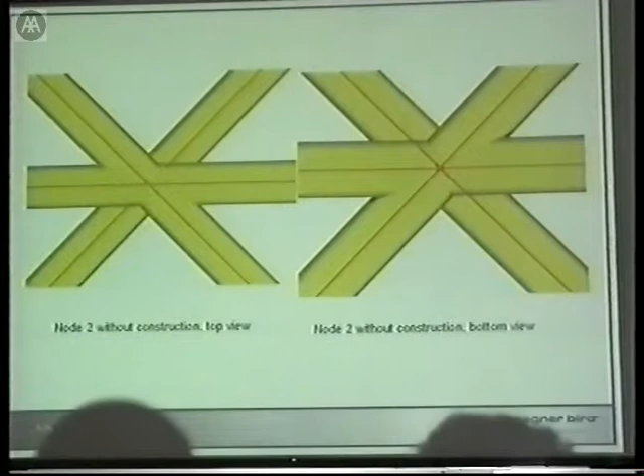Here you see another image how the bottom side works. That's the perfect node, which is at the spherical position, where you see that everything comes together nicely, no problem at all, top and bottom. And what we finally did, and this was a long development, we developed a twisted node, where the legs of the node are rotated towards each other, which is another level of complexity for the fabrication of the nodes.

But what it achieves, and you will see that on the next one, I'll go a little bit faster, that's how they were twisted when you look at it from the top. And here you see the actual model on the top view, everything comes together. And on the bottom view, here you see it without the center lines. When you look at it first, I think it looks quite logical. When you look at the lines, you see that with this node, we have just compensated the irregularity of the incoming members.

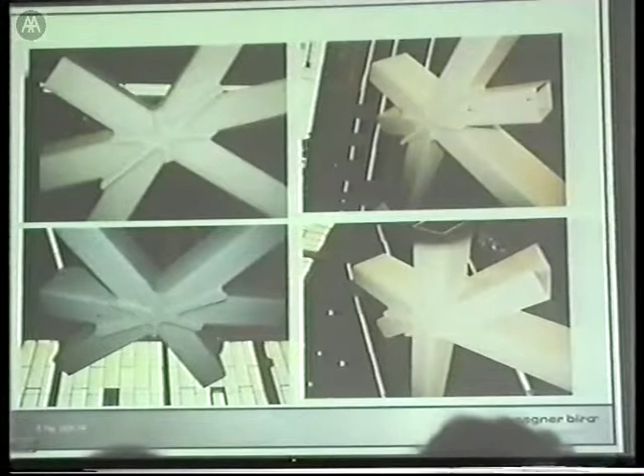Before I go to that, I want to show you now another animation which should explain how we're working. We, of course, have programmed it. It's twice the size of the British Museum, so we needed even more help from the computers in order to realize it in a quick and efficient time.

Here you can see that we are selecting a part of the grid. This was produced by one of my engineers who has written the program. The first thing he does is he puts in the elements just with overlength, and then he is selecting certain steps, certain modules, and then he is cutting. Here you see the come together offset.

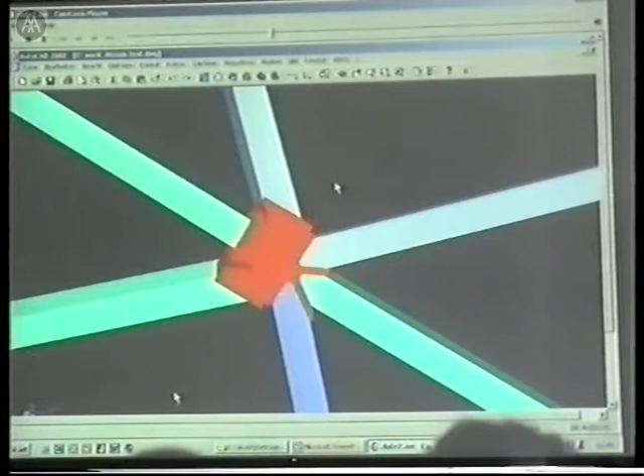And the different orientations are put in, and here you see that the elements are cut, and this irregular node is created automatically with all the data necessary for the machine in the workshop to produce it. What we also can do, what you can see here, we can define a gap between the node and the element, because if we produce everything with the right length, you've got some tolerances in it, which means that the structure is growing.

What we did is we did some tests and we calculated what gap we need to have to stay within the tolerances. And this was one of the measures we had in the computer program optimized so that we got the flexibility we needed.

And I think now you will see how he pulls off one of these elements. Yeah. And how the members have to be cut to fit to the node. All of them different once again. I think I'll stop it. That's the top side where everything comes together perfectly.

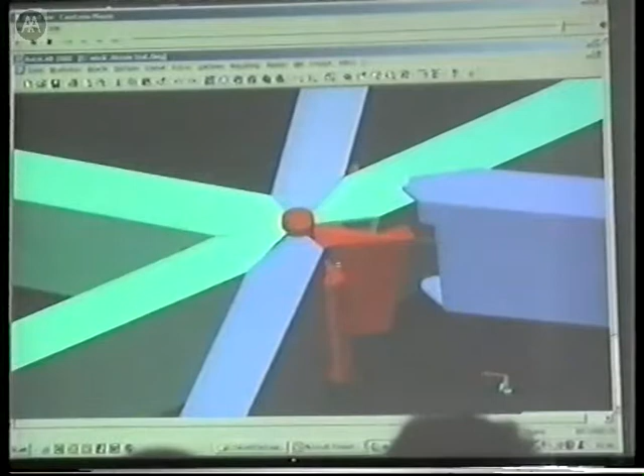So. I'll try to be fast. I've got 2 more projects, but I'll go through it quickly.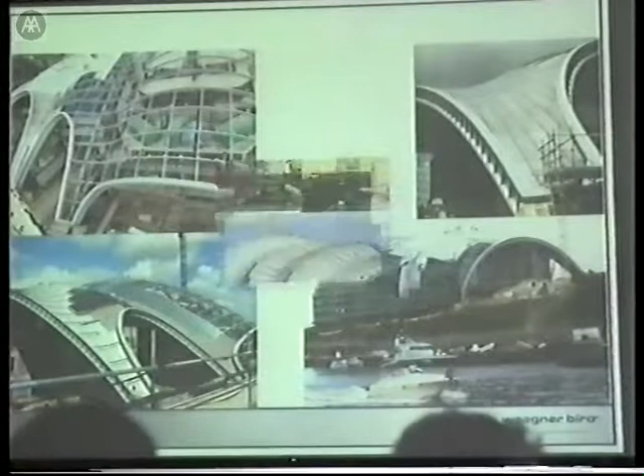That's the detail where the panel comes down and the glass continues on in the north, and this is the gutter which is hidden behind the panels, which collects all the water. That's a test piece we did. Flexible joints at the side wall, and this is how the panels are installed. Run through it quickly. And by now it is finished.

I have got another animation here which shows you how the computer program works. I couldn't fit them into the presentation. The presentation crashed this morning. It was too many megabytes.

That's the final product here. This is the grid where everything starts off. It's quite a lightweight structure when you look at it at the end. And this is how the computer puts the profiles in and then cuts the profile, creates the lugs, the end plates, the stiffeners, everything. And all this information, which is automatically generated, is put into workshop drawings, and is the basis for the fabrication and installation information.

You see the tertiary members coming in. Once the geometry is defined, once the data are defined, it's easy. Here you see the end plate, the holes for the bolts, the stiffeners. Everything has to be defined in general so that no manual interference is necessary. The principles have to be agreed, and then these things can be programmed to deal with the geometry in an economic manner.

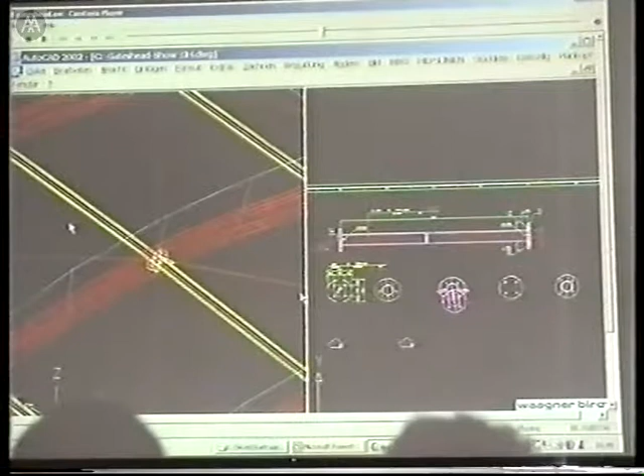And here you see how, at the same time, while building this up, we are producing the information for the workshop and for the fabrication and installation. And from the same computer model later on, you will see that the panels are integrated into it as well, and the information on how to produce the panels is also optimized.

That's the upstands for the panels. This is the substructure for the panels. Here you see the plates once again being created. And here you see the panels coming in.

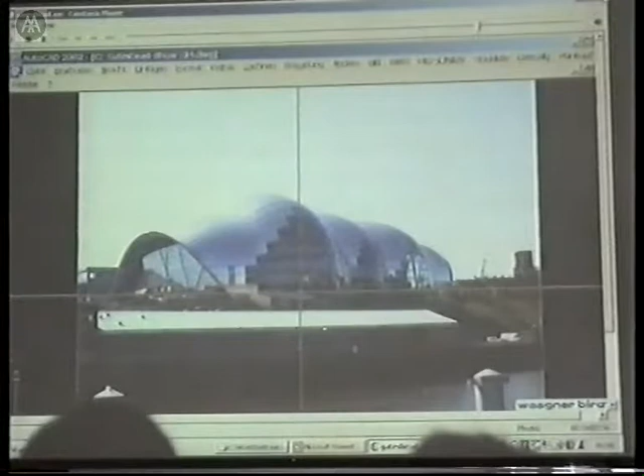That? I think I've lost my other presentation, which is not good. That's what happened this morning as well. I thought I had overcome it. I think now.

The last project I want to show is a project from Austria. In Austria there are not so many exciting projects happening, so we need to look at other countries to get the right level of challenge. But there's one exceptional project in Austria which was done. The client was the owner and inventor of Red Bull, which is an energy drink I'm sure you know as well. And he is the richest person in Austria.

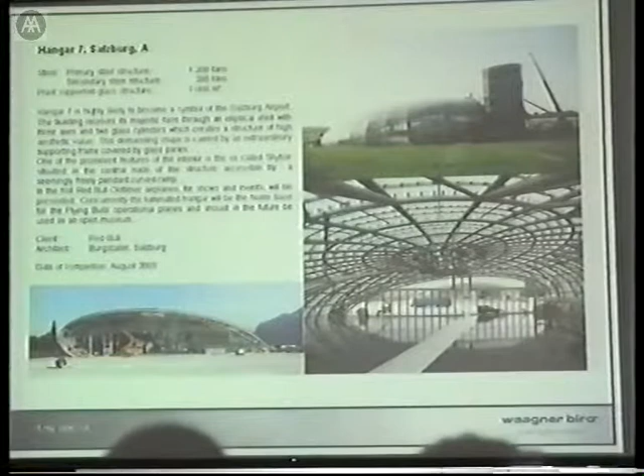So what the architect produced there was an elliptical shape in both directions, an ellipsoid with a radial structure, which was rotated. The reason for that, and here you can see the rotation, was that there was a building line which they couldn't exceed because the hangar is right next to the airport. Then we got two cylinders here on this side, which are sticking out as well. They are cut off along the same line, and they are integrated into the structure.

Here you see the radial structure. I think you will understand that this is not very efficient to have such a bend, but this was what we have been asked for. And then we got two radial lines which didn't find the support. We were allowed to move these two cylinders around a little bit so we could find supports for the other ones. And the other issue was we haven't got too much curvature here, so it was quite flat, and we had problems with buckling.

So we said we need some sort of structure underneath to support it, and the architect gave us 50 centimeters, which is nothing for a span of 80 meters. We said we need 1.5 meters, and he said no for quite a while, and then he came back and said, yeah, you can have 3 meters. Because he got another idea. This part is now a bar. So he has created a sky bar in the center and another ramp to get up there. And now we got more than we wanted as a structural height, which sometimes happens.

Here you see the various sections. Here it's curving back. That's the longitudinal one, which is quite flat. And this is the short side, which is quite steep. I'll go a little bit faster. That's some technical details, how the welds come together, how the tubes, you can imagine that it's quite complex. We tried once again to put as big pieces as possible together in the workshop to have minimal work on site. The glass itself is flush, countersunk, laminated glass with a secondary structure of flats.

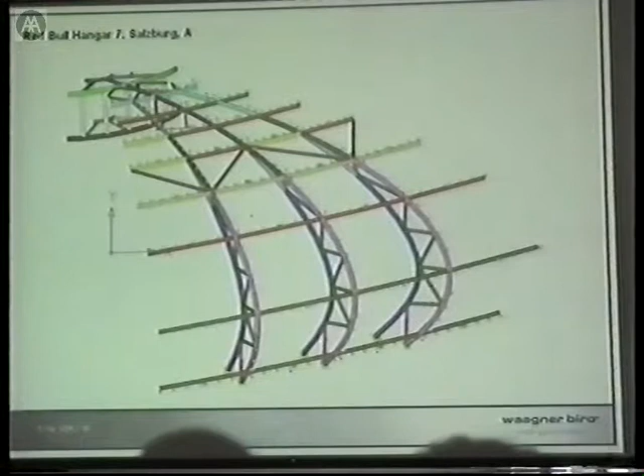Here you see the real picture. And this is how we built up the model once again. And we had to put all these brackets onto this curvature in the right position in order to get the glass and the secondary structure in. The red points you can see are the positions of the holographic targets. We built a model which we gave the surveyor where he could monitor the various elements so they are positioned in the right order and the right place.

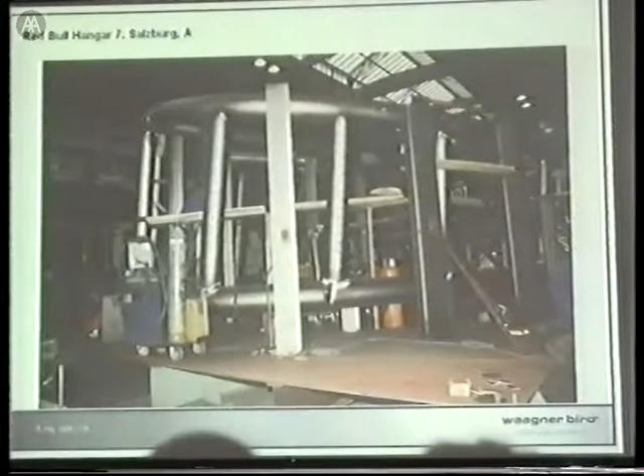The cutoffs are, it's not very visible, but the cutoffs are quite strange as well. We had to bend tubes with non-constant radius to follow the ellipse. We marked up the line to get the position for the right elements. That's the central part, which I was talking about. Curved elements with N shapes. That's how we got the brackets in.

Yeah, and finally I'll come to my ramps once again. There is one going up here, which is this one. There's a platform running at the same level to the front. And this was the ramp we got later on to follow up to this sky bar, which is in the center here. Here you see the section of the ramp.

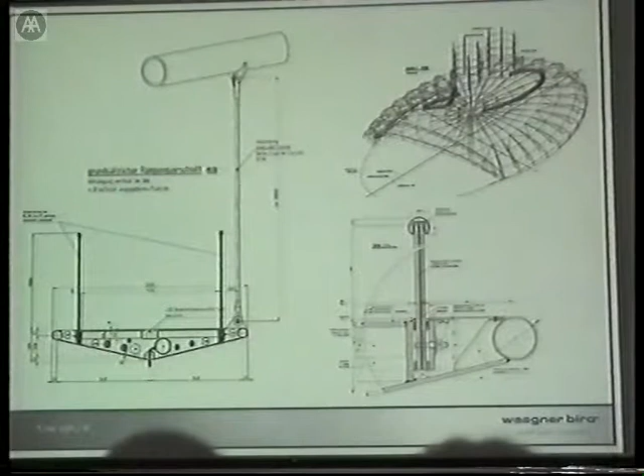It was quite interesting. The architect decided to make it a triangular section. So when you look at it, it looks like a flat piece of paper. You don't see the height here. The fixation of the glass balustrades is integrated, so there's no upstand here. So it really seems to be a flush element. What sometimes makes life complicated as well, when you imagine that this is a private sky bar for the richest person in Austria, he wants to have each level of comfort he can have up there. So you've got lines for electricity, lines for water, for air conditioning and everything.

And here you can see that these cables were put in the workshop before we put the deck plate in. And then it was protected and put in. That's the end beam, which is in between the hangar and the cylinder. And that's the product.

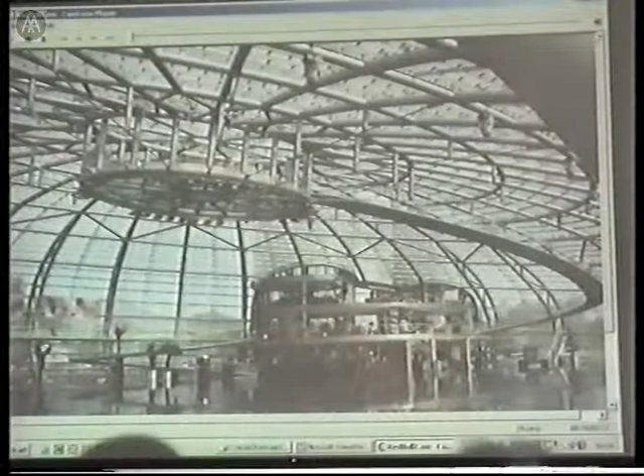And one more film, and then I'm gone. Which shows you how we have developed the ramp. Just need to find it. This is the sky bar up there, the ramp going up there, the cylinders. That's a public restaurant. And this is the basic line, as I have described it on the Reichstag project already. That's the basic system line where the ramp comes up.

We once again have put the sections in a certain distance. Then we have combined the bottom and all the other lines. We got the twisted plates. Here you can see how the various plates are put into the system. And then we take the plates, each individual plate, out of the computer.

We unfold it to get it flat. We take the marks of the adjacent panes with us, and then we cut it. And then we put it into this template, and we fold them back so that we get, at the end of the day, the geometry which is necessary. Here you see how the various plates are created.

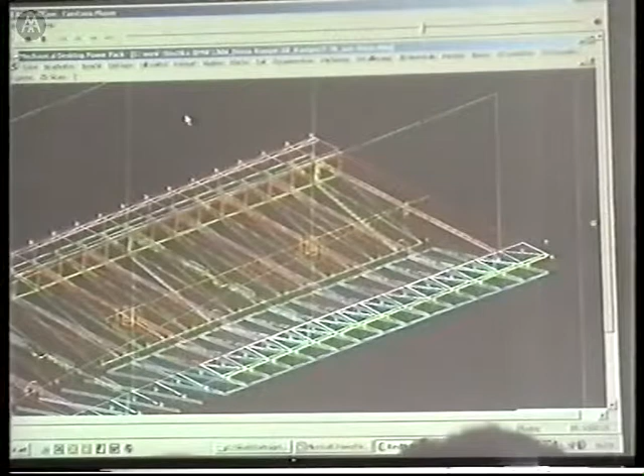And once the principles are agreed, that's once again something which can be automated, which can be programmed, and where all the data can be generated automatically. That's the deck plate. The other one. That's the tube, which runs on both sides. Second tube. Here you see the spotlights. That's the model which is the end product of this automatic process.

And then we pull out the various plates to allow them to be cut. That's the workshop drawing which then is produced automatically, which doesn't look like a standard workshop drawing. And here you see once again the templates. They are adjustable because the inclination wasn't perfect. That's the other ramp, the lower one, which is hung from the main structure, which goes from the ground level to level 1.

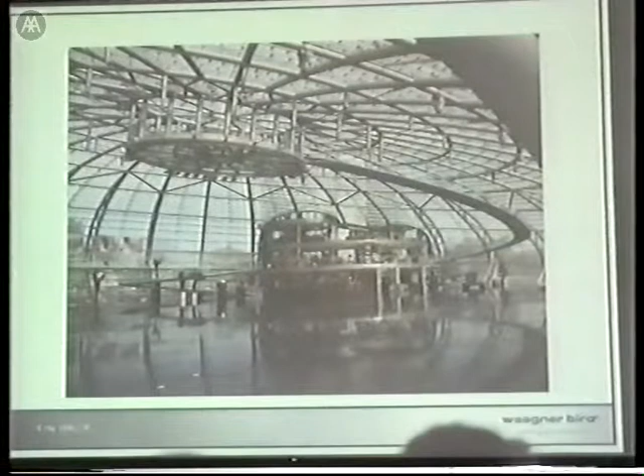And here you see his aircraft being parked in there. It got more than that. The biggest one here is a DC-6; I'm not so familiar with aircraft, but I think it was the biggest propeller aircraft which was available. And there were two aircraft still existing. One was from Tito, the Yugoslavian dictator, which was sold to Africa and which was flying around there with

tourists on tours, and the other one was from President Ford from the United States. I think he inspected both of them, and he decided that the one from Tito is the best one to repair and to refurbish, and he has brought it in pieces to Austria, and now it's put together, and it will fit into the hangar. But it won't be a passenger aircraft anymore. I think inside it will be the most luxurious aircraft you can imagine.